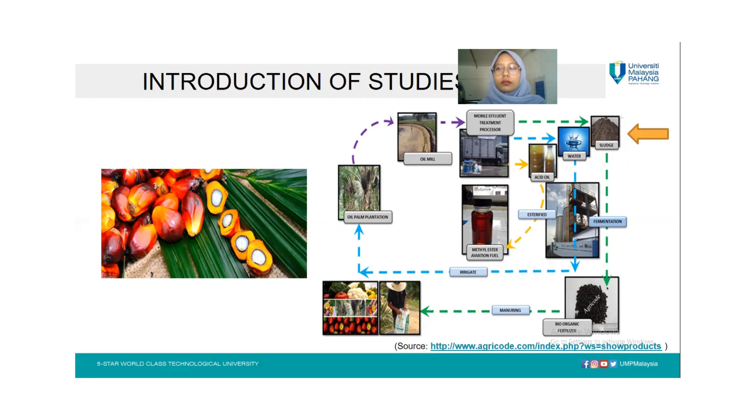This is the sludge obtained from FPG Oleochemical Sdn Bhd, which is located at Gebeng, Pahang. We will use this and conduct experimental work in the form of concrete cube and concrete prism.

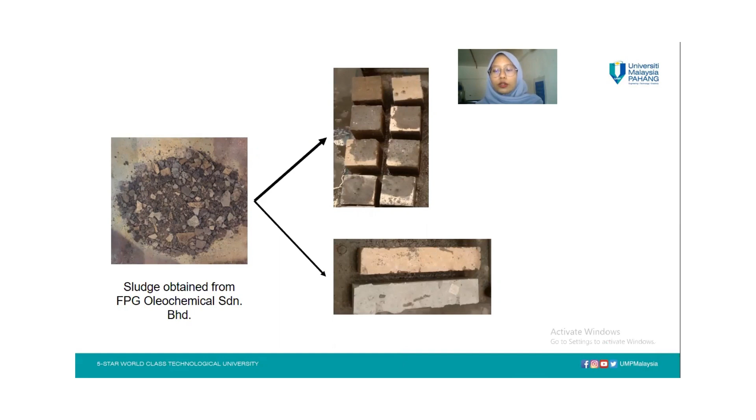The problem statement is the abundant disposal of waste to the environment, which will need more spaces and leave harmful toxins in the environment. Next, there is a need for study in concrete properties to investigate the suitability of concrete mixture with the waste. Lastly, the amount of moisture absorption of concrete using oleochemical waste as partial sand replacement.

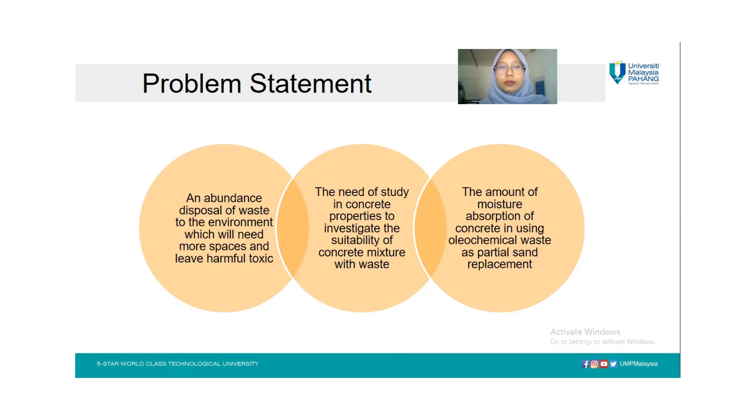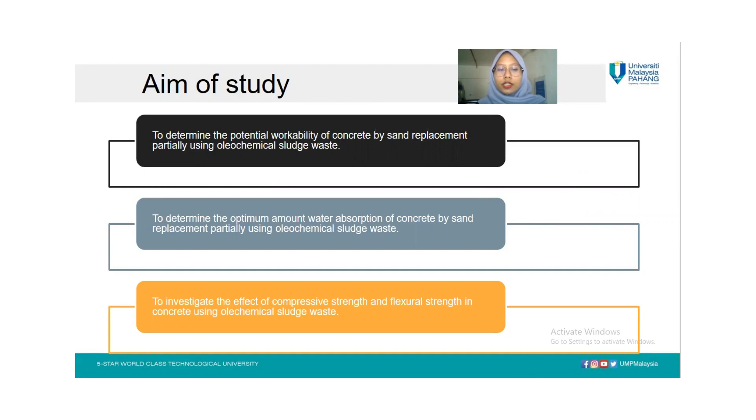The objective of this study is to determine the potential workability of concrete, to determine the optimum amount of water absorption of concrete, and to investigate the effect on compressive strength and flexural strength in concrete.

The scope of study is that the oleochemical sludge waste are obtained from FPG Oleochemical Sdn Bhd. The oleochemical waste are ground to the required size before use. The replacement by volume of oleochemical waste used as partial sand replacement are 0% as control, 5%, 10%, 15%, and 20%. The specimens are in the form of cube and prism, sizing 100 x 100 x 100 mm and 100 x 100 x 500 mm respectively.

There will be 75 samples that need to be tested. The samples for compressive strength test and flexural strength test are tested at day 7 and day 28, while the sample for moisture absorption test are tested at day 28.

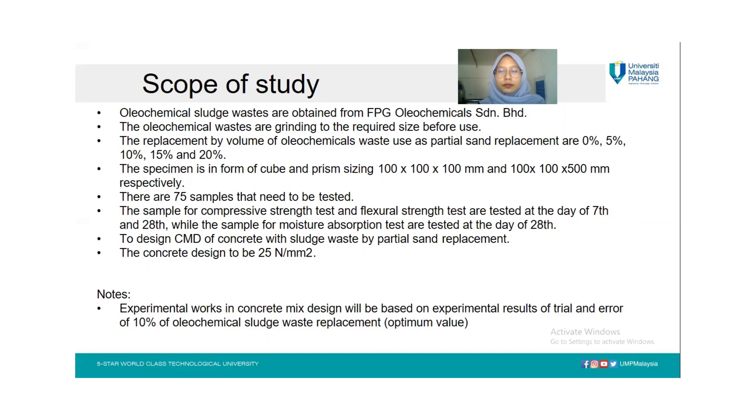There will be a need to design the mix of concrete with sludge waste by partial sand replacement. The concrete design target is 25 Newton per millimeter squared. The experimental work in concrete mix design will be based on experimental results of trial and error, with 10% oleochemical sludge waste replacement taken as the optimum value.

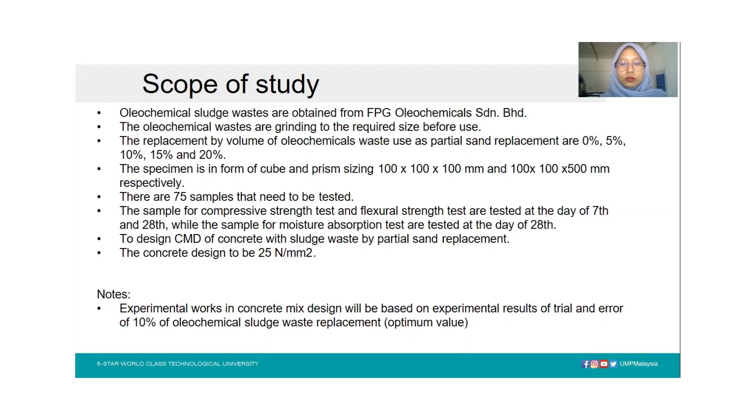This is several of my literature reviews. The first research paper reviewed the strategy on maintenance to enhance reliability of nature and equipment, make maintenance cost effective, boost efficiency and effectiveness of maintenance, improve workplace safety, and produce sustainable plant throughput.

The second research paper reviewed the disposal of oil sludge harming the environment. An action to be taken is recycling of sludge as well as construction and demolition wastes, forming them into building materials. The oil sludge were tested and analyzed by referring to standard method APHA 1998 according to that country.

The third article is a review about the effect of dry sludge waste on concrete performance, physical and mechanical properties, where waste sludge material was replaced with fine and coarse aggregate in various percentages.

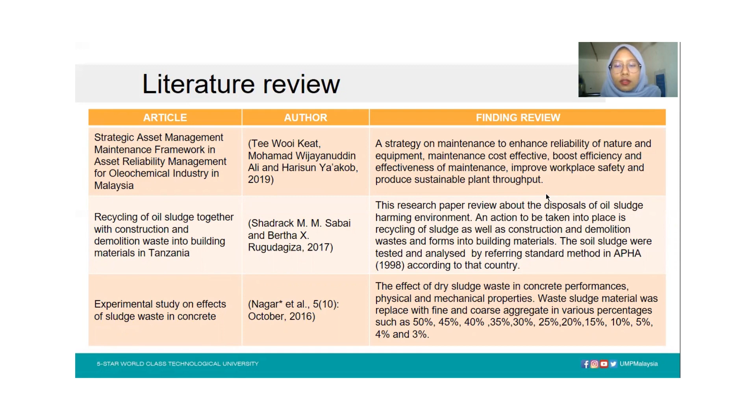This is the research methodology. Begin with the research title, statement of problem and objective,

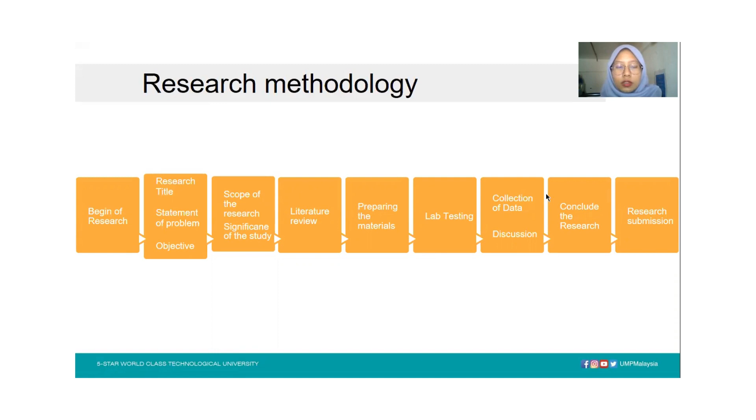followed by the scope of the research and the significance of the study, and then the literature review,

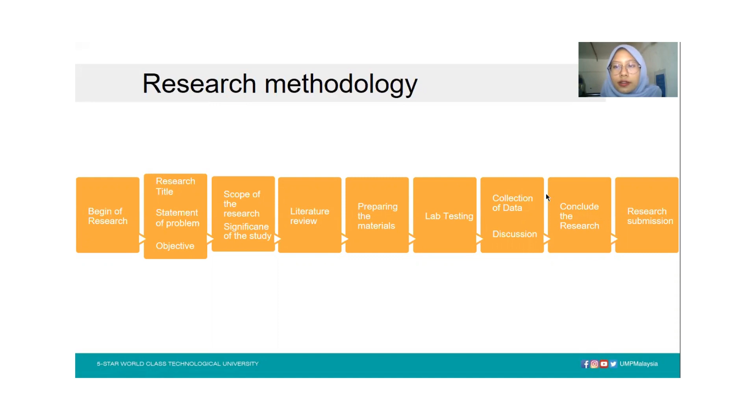preparing the materials. After that, do the lab testing. Finish the testing, we will collect the data and discussion. Finally, conclude the research.

The lab works include preparing the materials, which use cement, fine aggregate, coarse aggregate, and oleochemical sludge waste.

For the sieve material, we will sieve the fine aggregate, coarse aggregate, and oleochemical. After that, we cast based on this mix design in form of cube and prism.

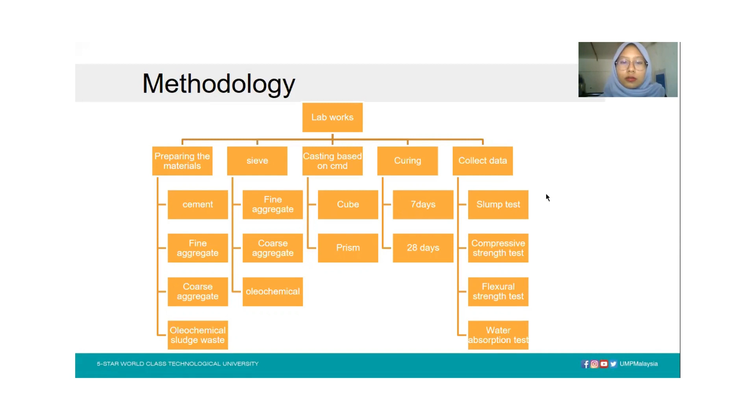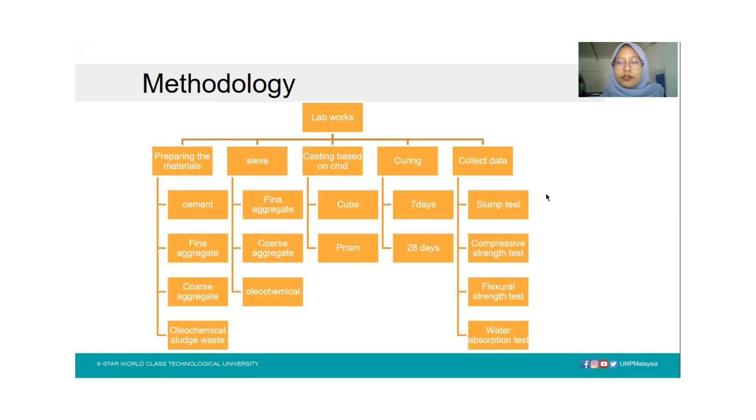For curing, there will be for 7 days and 28 days, and collect the data for slump test, compressive strength test, flexural strength test, and water absorption test.

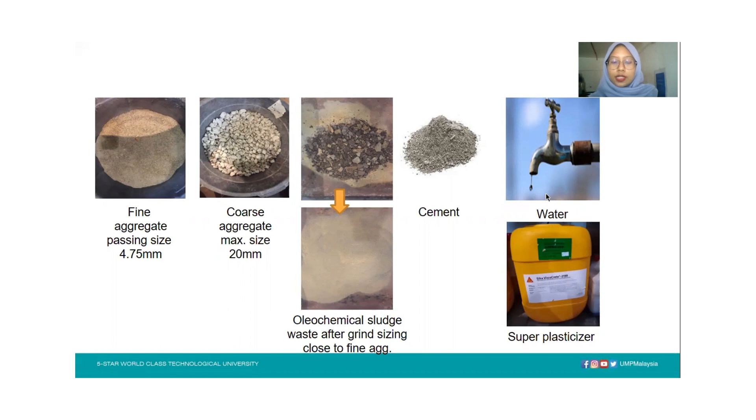The material used is fine aggregate, which passes size 4.75 mm. The coarse aggregate is passing maximum size 20 mm. The oleochemical sludge waste, cement, water, and super plasticizer.

This is the machine and machinery used in laboratory, which is oven for drying the sample, LA abrasion testing machine for grinding the oleochemical, the sieve shaker machine

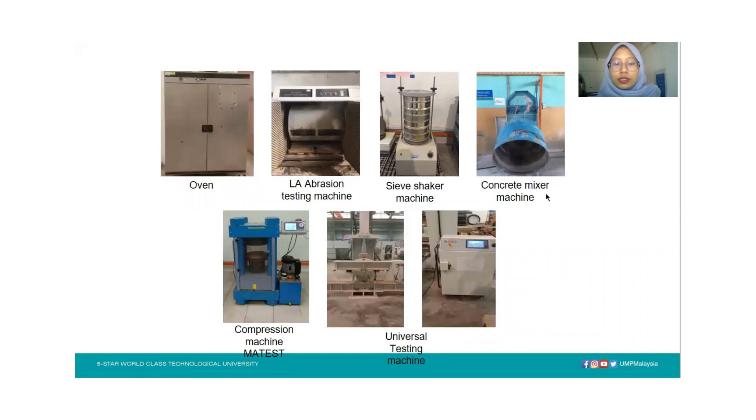for sieving the material, concrete mixer machine, and testing machine for compressive is compression machine MATEST, and for flexural is universal testing machine.

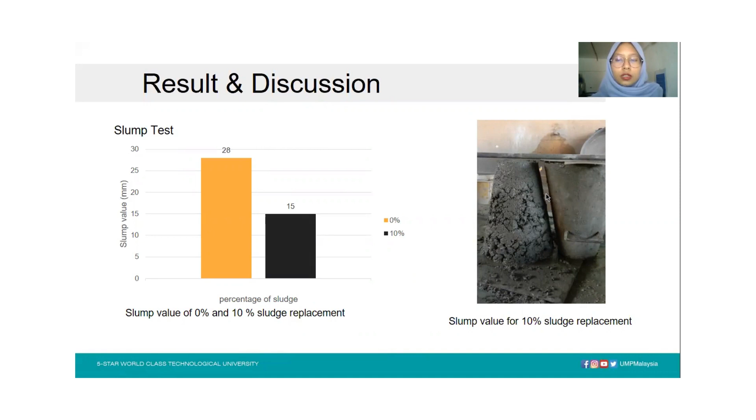The result obtained for slump test in 0% and 10% sludge replacement. The picture shows the slump value for 10% sludge replacement.

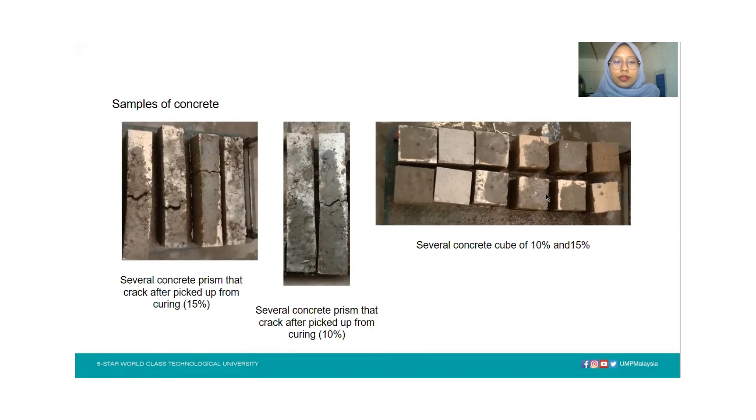For the compressive strength test, the value for 0% sludge replacement in 7 days and 28 days. For 10% sludge replacement, we cannot obtain the result.

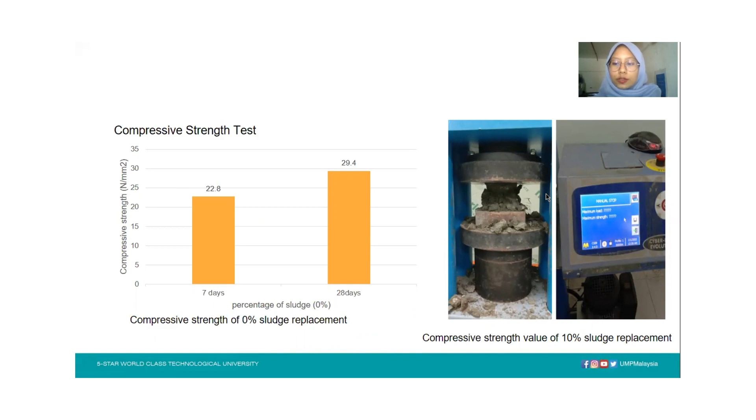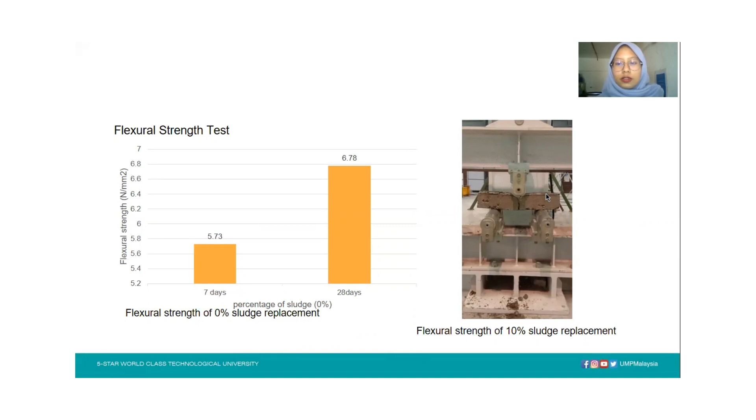For flexural strength test, result is 0% sludge replacement for 7 days and 28 days. For the picture is flexural strength test of 10% sludge replacement and the result cannot be obtained.

My expected result to be obtained from experimental work is A, which is compressive strength test, compressive strength value of the concrete, the flexural strength value of the concrete, and the optimal amount of water absorption of the concrete by partial sand replacement using oleochemical sludge waste for 0%, 5%, 10%, 15%, and 20%.

Firstly, the concrete in this study was carried out with adding potential oleochemical sludge waste by controlling the optimum percentage of waste concrete, which is 10%.

Then proceed for the 5%, 15%, and 20% replacement with the same mix design as 10% replacement. But due to the limited time left, the experimental work proceeded after the third trial and error of 10% replacement.

The testing was managed to be conducted during MCO time. The result obtained for 10% failed. The concrete did not achieve targeted strength.

So the result obtained for 5%, 15%, and 20% are also failed. The concrete oleochemical replacement did not achieve any result expected.

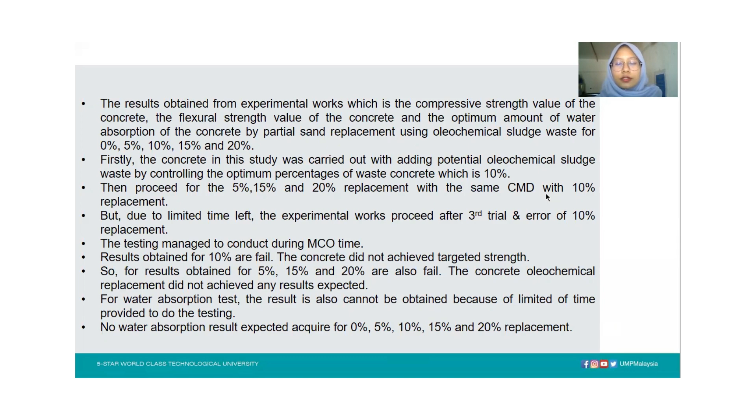For water absorption test, the result also cannot be obtained because of limited time provided to do the lab testing. No water absorption result was obtained for 0%, 5%, 10%, 15%, and 20% replacement.

In conclusion, the objective of this research cannot be achieved. The result obtained from testing cannot be used as the trial and error for 10% replacement, and they did not achieve the best result, due to the MCO limitation of

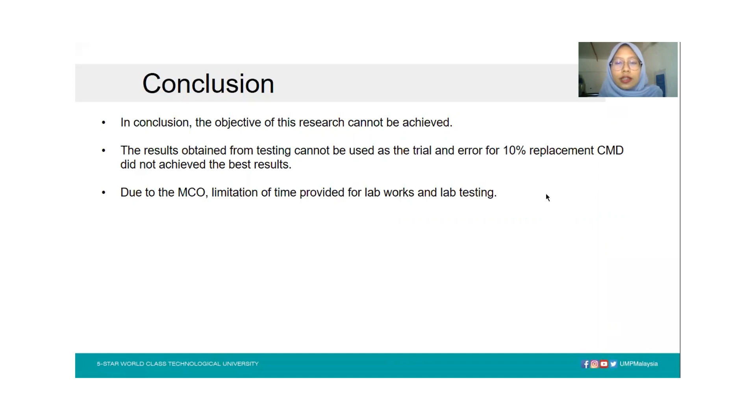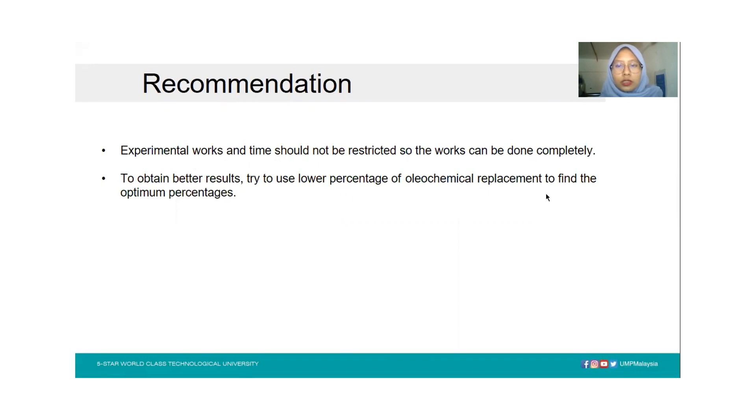time provided for lab works and lab testing. In my recommendation, the experimental works and time should not be restricted, so the work can be done completely. To obtain better results, we can try to use a lower percentage of oleochemical replacement to find the optimum percentage.